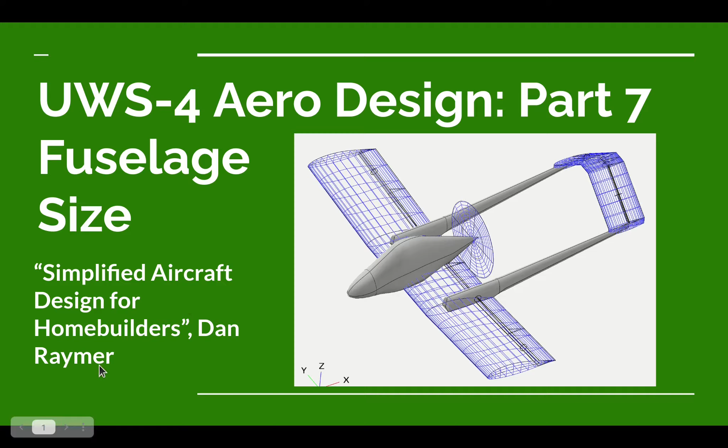Welcome to another ultralight design video of the UWS-4 Ultralight Airplane from the Ultralight Airplane Workshop. In this design series, we've been using a book from Dan Raymer, titled Simplified Aircraft Design for Homebuilders. In this particular video, we've reached the end of Chapter 3, where we figure out the size of the fuselage of our ultralight airplane.

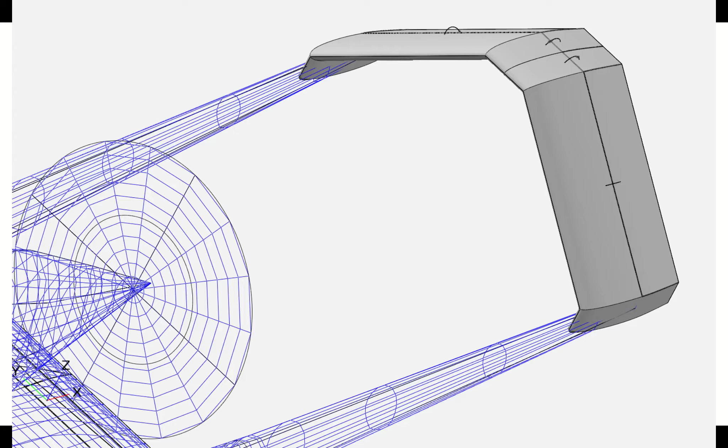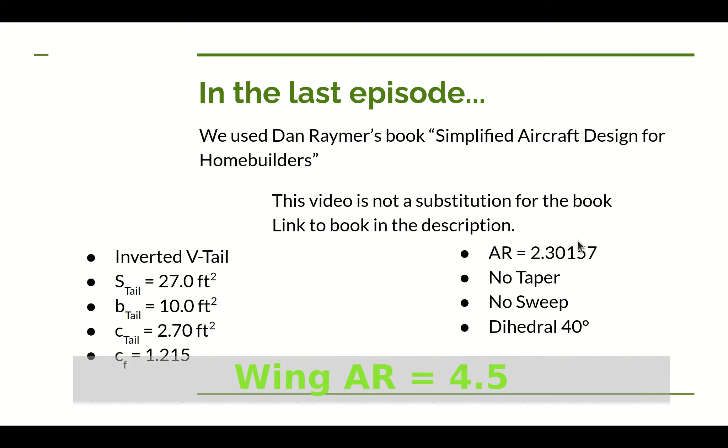Before we hop into this, let's cover a little bit about what we learned in the last video. In that video, we figured out what we're going to do for the tail of the ultralight airplane. We decided on using an inverted V-tail, largely to try to keep the tail out of the slipstream of the propeller. I want to reduce the drag on that tail, particularly because this airplane is intended to be a longer flight ultralight. I want to fly to nearby fields, but nearby is quite a ways away, so I'd like to have a little bit less drag on this ultralight so I can have a little more range. Then we figured out the span and chord of the moving part of the tail, the control surface. We checked that aspect ratio to make sure it's quite a bit less than the wing's, so that we're more likely to have the wing stall before the tail does. We're not going to use any taper or sweep, it's a pretty straight tail, and the dihedral for this V is 40 degrees.

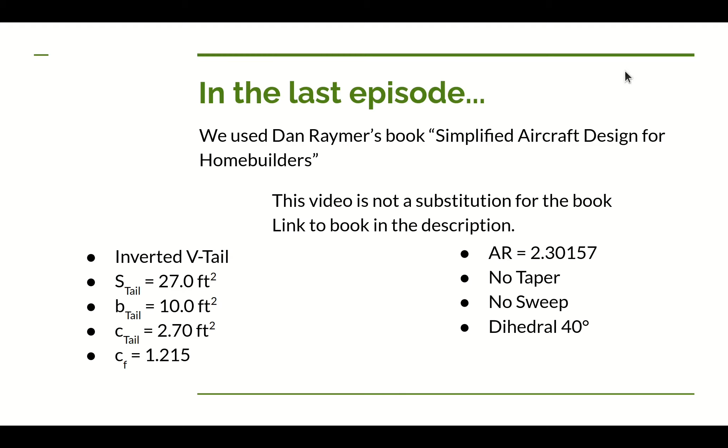There's something I should point out here that I haven't done a good job of in some of the previous videos. All this aerodynamic work we're doing right now in this chapter of Dan's book, these are really crude estimates. Perhaps crude is overstating it, but these really are just first order estimates. The reason we are doing these first order estimates is so that we can get some estimates of other parts of the airplane that would be very difficult to do otherwise, for example, the weights of the parts of the airplane. And from things like the last video, it'll help us calculate what the neutral point of the airplane is, which will let us calculate the longitudinal static stability of the airplane.

And from all that, we can come back and figure out if we need to resize any of these parts of the airplane that we're figuring out in this chapter. Now, the last thing we have to figure out in this chapter is the size of the fuselage.

Dan makes a really good point in this section. Typically, once you get to this point, there isn't a whole lot left to decide on sizing your fuselage. You already know where your main wing is, you know where the tail is. That by itself will let you figure out what the aft length of your fuselage is. Really, the only thing left is the part in front of the wing. But if you have absolutely no idea, Dan gives you an equation to get a rough estimate of what your fuselage length should be, based on the gross takeoff weight of your airplane.

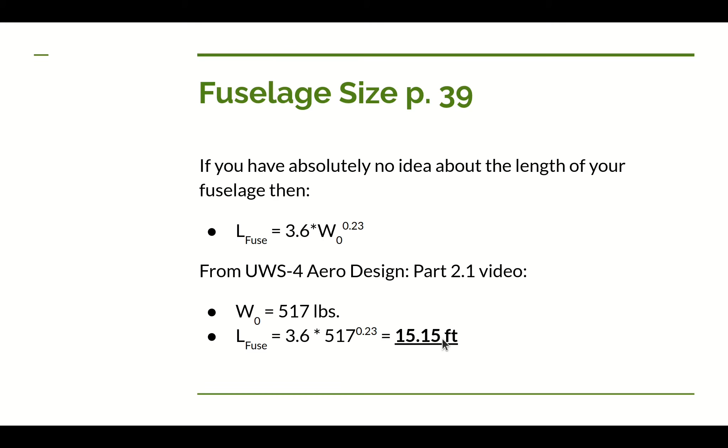So I decided, let's go ahead and plug this in, see what we come up with, and see how it compares to the fuselage length I come up with on my own without using this equation. From video part 2.1 of our Aero design, we had a gross weight of 517 pounds. Once you plug it into this equation, we come up with a fuselage length of 15.15 feet. Now it's kind of long, but it's not an outrageous length. That's not bad.

So the next thing Raymer talks about is fineness ratio. Fineness ratio is defined as the length of the fuselage divided by the diameter of the fuselage. Here in a moment we'll talk about how to calculate diameter because most of us don't have circular fuselages. There's a certain range of ratios where you can get some fairly decent drag numbers on your fuselage, whereas if you go outside that range, you're really going to increase the drag.

Now Hoerner, in his Fluid Dynamic Drag book, says that 3 - really 2.7 but rounded up to 3 - is probably the smallest ratio you want for the finest drag. You go smaller than this and you start increasing the drag. You go larger than this and you may or may not increase the drag. Raymer says for most home-built fuselages, we're getting significantly larger than 3 for our fineness ratio. We're getting up close to 6 or somewhere around in that area. But once you start going past 6, you start increasing the drag again.

Now for 3 or smaller, you're generally increasing the drag just because you're getting turbulence behind the fuselage. When the fineness ratio gets above 6, you start getting into a different kind of issue. You have a significant amount of wetted area, and within that wetted area, you're generally going to have a lot of empty space - particularly behind where you'd have baggage in the airplane, clear back to the tail. That's typically empty space you can't do much with, but it has a lot of surface area. When you have a lot more wetted area, you're going to have a lot more friction drag.

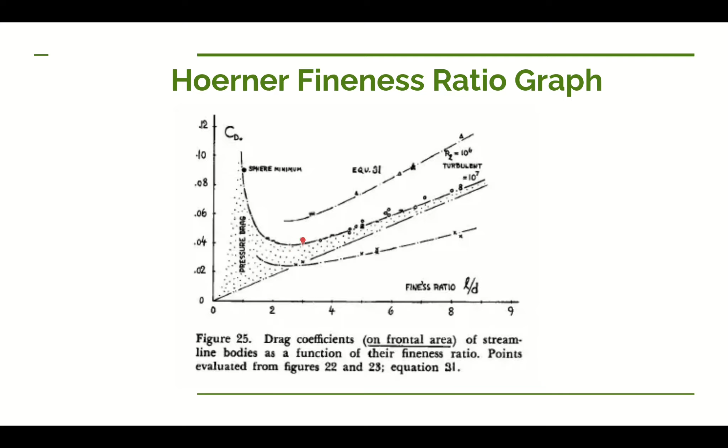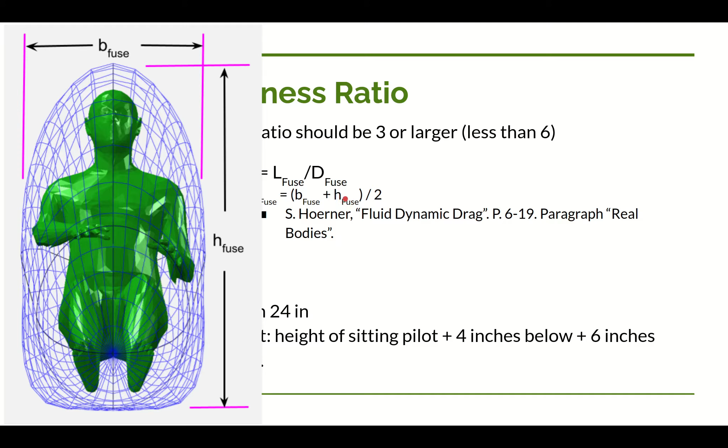Well, now let's talk about how you can get a really rough, quick estimate of the diameter of your fuselage. What you can do is take the width of the fuselage, here represented by B, plus the height of your fuselage - we're talking about the maximum width and maximum height. You add those two together, divide by 2, and you can use that as the diameter for your fuselage. Now this particular equation for estimated diameter of fuselage also came from Hoerner's book on fluid dynamic drag, on page 6-19 in a paragraph called Real Bodies.

Well, what are we going to do on the UWS-4? The Part 103 requirements for ultralights from the Federal Aviation Regulation in the US say we can only have one pilot. Well, that kind of helps us narrow down how wide the fuselage is going to be. I'm going to start with 24 inches - that's not too bad for one pilot. Now sometimes you'll see this higher, especially if you want to handle heavier pilots - you can go up to 30, 36 inches if you had a really large pilot. I'm a pretty skinny guy, at least currently, so I'm going to start with 24 inches. Down at my elbows I might want to make it a little bit wider, but I think at the shoulders 24 inches will probably be about right.

Now for the height, I'm going to take whatever my seated height is and put 4 inches underneath the seat. That's going to be for a crush area, in case I happen to have an incident where I impact the ground fairly flat, to help reduce the G-force that I experience.

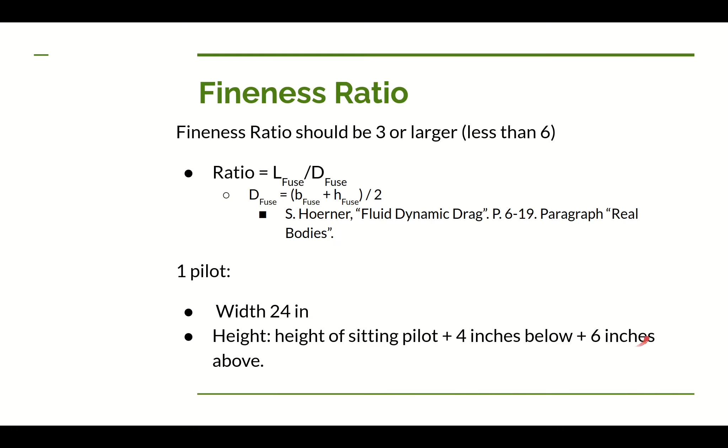I'm also going to have 6 inches above my head. That 6 inches will be for things like a helmet, headphones, and if I'm in heavy turbulence, I'll be getting bounced up and down quite a bit, so it gives me room to bounce without hitting my head against the ceiling of the fuselage.

Now here's something I'm going to add that is not in Dan's book, but some rule of thumb you can use to figure out the length of your fuselage, your first estimate anyway. Instead of using Dan's equation, the length of the fuselage aft of your main wing, assuming a conventional configuration, not a canard, is generally going to be determined by the length of your tail.

We've already talked about that in the last video, figuring out where to place our tail. The length of the tail is the distance from the mean aerodynamic chord of the wing to the mean aerodynamic chord of the tail, so that will generally determine the length of the aft part of your fuselage in order to connect the wing to the tail.

If you want to see more details about how to calculate that tail length, we did that in part 6. I'll put a link in the upper right hand corner where you can go back and see part 6 and see details on how we calculated that tail length.

Now let's talk about forward of the wing. For ultralight airplanes, we typically have a tractor configuration or a pusher configuration. For a tractor configuration, in general, your pilot's going to be seated at the CG - somewhere from the navel up to the chin of the pilot is going to be right at the CG of the airplane.

Now I'm going to show you an exception to that rule of thumb. This is an Ultracruiser. It uses a half VW engine, which is a pretty heavy engine, and in order to counter the weight of that engine out in the front of the airplane, the pilot had to be moved back aft of that CG location. So wherever the feet of your pilot is, you'll have a firewall a couple inches in front of that, and then your engine in front of that firewall.

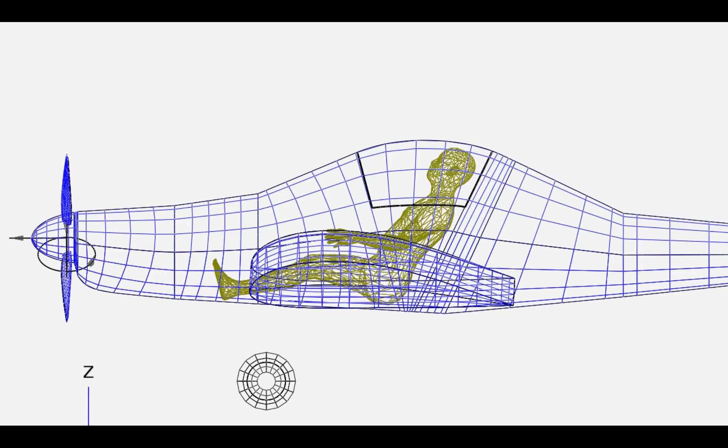Once you have that engine placed, you pretty much know what your fuselage length is going to be. So for a tractor configuration, it's pretty easy to figure out just how long that fuselage is going to be - just placing the pilot in position and the engine in front of the pilot's feet is a pretty good first estimate.

Now for a pusher configuration, we're going to assume that the prop is just after the wing, just a few inches, which pretty much places that engine right at the aft part of the wing. In that kind of position, this is a very rough estimate, but the pilot's navel is going to be pretty close to the leading edge of the wing, or the chin will be fairly close to the leading edge of the wing. So that's a good place to put your pilot to start with.

Then in front of the feet of your pilot, you're going to need a little bit of crush depth, a little bit of room to move the pedals around. So you'll need a foot for a very rounded nose, up to about 1.6 feet for a slightly more pointed nose. If you put that together, that'll pretty much determine your fuselage length - a fairly good, rough first guess on where to put things for your airplane.

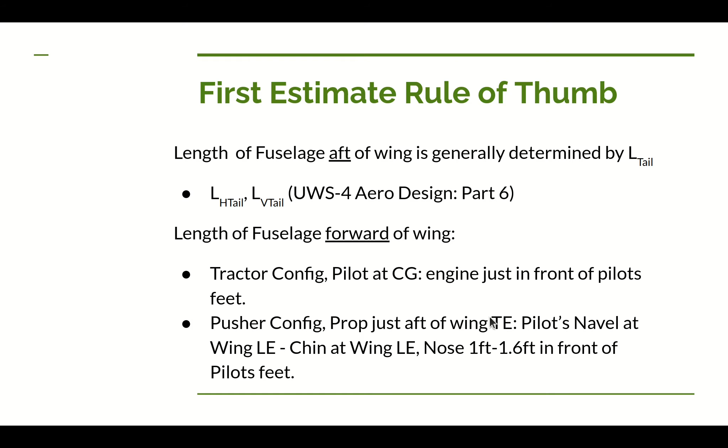Now you're going to refine this a little bit later once you start getting more reasonable estimates for the weights of the parts of the airplane. Calculating where the CG is, you'll start moving your pilot and engine around to get it right. If you want a design more like the Quicksilver MX, with a pusher configuration and no enclosure or windshield for the pilot, putting that pilot in the same position relative to the leading edge is still a pretty good starting point.

So here's what I have for the first estimate for the fuselage of the UWS-4 Ultralight Airplane. Now in the last video we figured out where to put the tail of the airplane, so all I really needed to do is connect up some booms from the wing to the tail. We already talked about why I decided not to do a single boom from the top of the cabin to the top of the tail.

I'm going to have the front part of this boom be the same thickness as the thickness of the wing, and then it will taper off back here. You kind of ignore the part of the boom that's inside the wireframe of the tail. I don't exactly know what that structure is going to look like.

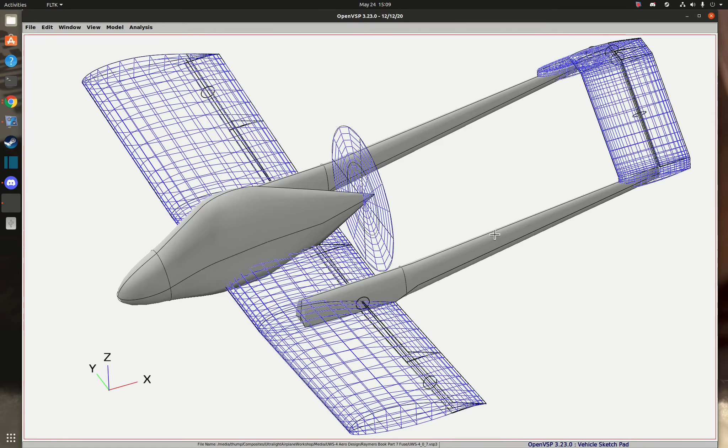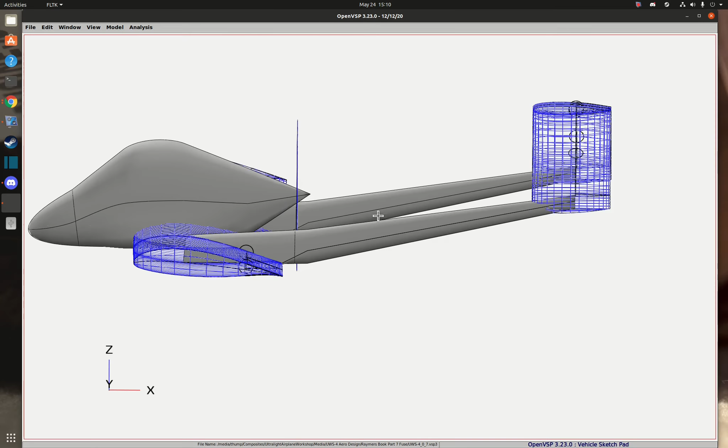One of the things I did do on this boom, as you probably remember in the last video, we talked about this boom slanting up a little bit. Let me take a side view real quick so you can see the boom slants up. I wanted to try to reduce the drag from this boom. I didn't want to use a round boom, so it's actually teardrop shaped. It's round on top and comes to a point underneath. But with the air flowing over it like this, it's a nice teardrop shape, and that should help reduce drag on this boom. I'm probably going to get some drag in this area here.

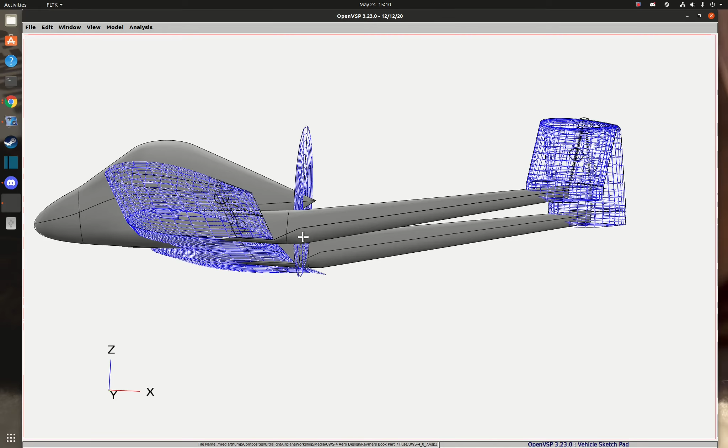The downwash of this wing is going to come down a little bit like this, so I could end up having a little bit of a drag area, an air bubble, an air separation in here. I might try to figure out a better way to fair this so I don't have some drag here.

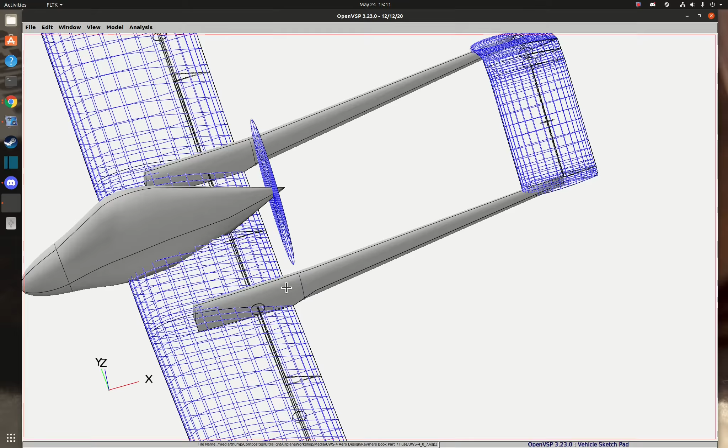One of the things I did do to try to reduce interference drag is that I kept the width of the boom the same from up here at the thick part of the airplane to the trailing edge. That way I only have one direction of pressure recovery, that's along the wing. If I were making this boom slimmer in this area as it went back, that'd be a lateral pressure recovery area also, and that would end up causing interference drag. So right in here, the boom is straight laterally until I get past the trailing edge of the wing. That will help reduce some interference drag.

And I'm also going to have to do a little bit of work right in here to reduce interference drag. I'm going to have to put a fillet in here. Now let's move on to the cabin here.

Now, something that will definitely change in the future is this area in here. This is where the engine's going to go. So there's going to have to be a cowling around here, which makes this area much bigger. I'm not sure how I'm going to make good streamlining here, but at some point I'll get that figured out. This is where the engine will go, so this will be a little bulkier in the future.

Now I want to have an enclosed cabin on this airplane if I can afford the weight, so I can reduce drag on this airplane so that we can extend the range. Let me make this cabin transparent and we'll pop in the pilot so we can see where he's sitting.

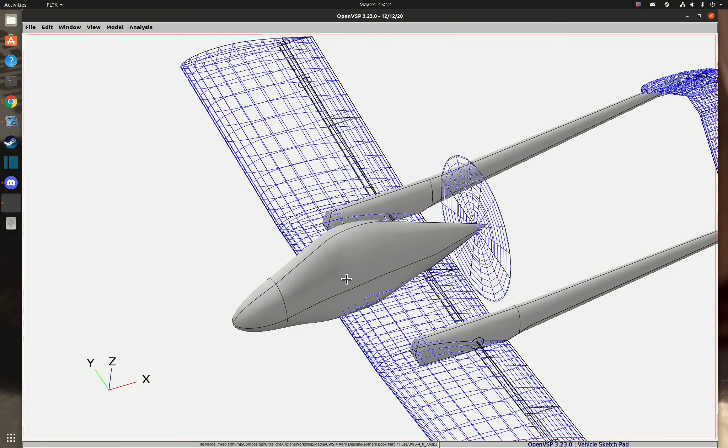So as you can see, I've placed the pilot with his navel and chin kind of dividing the area right here at the leading edge of the wing. So that's going to be my first estimate on where the pilot will be. My guess is that I'll end up having to move him a little bit farther forward.

This engine is fairly far back here and going to be fairly heavy, and I think this pilot's going to have to come forward just a little bit more to get this CG close to the 25% chord of the wing. And I've got about a foot of area from the feet of my pilot up to the nose.

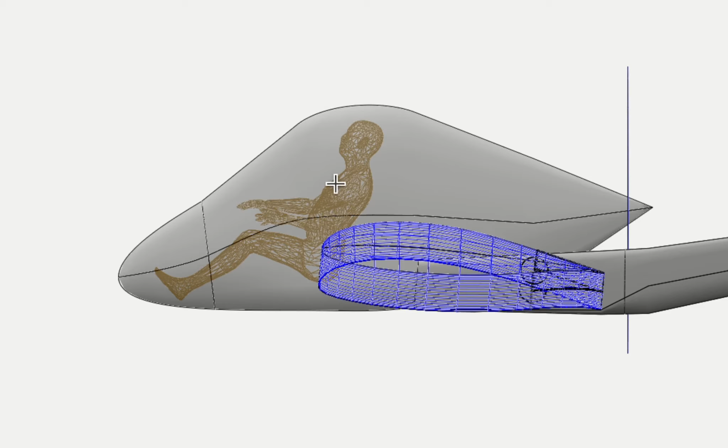I've got a little bit more than 6 inches of crush depth under here, and I probably need to raise this area up here. I don't think I quite have 6 inches above his head. I'll probably just lower the pilot just a little bit.

Now, one of the issues I'm going to have with this current setup is going to be interference drag right back here. Let me zoom in on this. Now here I've got a problem that I avoided back here. Here I've got this boom being the same width all the way back to the trailing edge. Well, I don't have that situation here.

We have pressure recovery from the thickest part of the wing coming back to the trailing edge, but I also have pressure recovery here on the fuselage. So that's going to give me some drag problems right in this area. Now I can reduce those drag problems by putting a fillet in here.

I've also reduced the drag problems a little bit. If you remember from a recent video on interference drag, I don't have this point coming all the way back to the trailing edge. If it did, I'd have even more interference drag. So since I've got this in front of the trailing edge, instead of way behind it where the prop would have had to be moved back too, at least I'm reducing it some. I'm going to have to do a little work here to try to reduce the interference drag in this area.

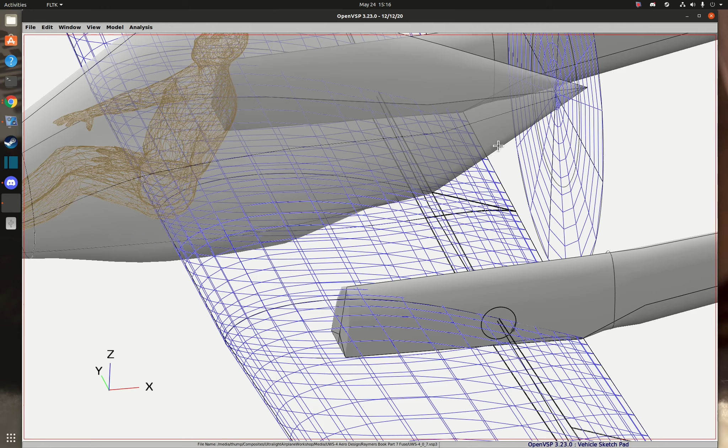Another reason I didn't bring this all the way back is that I wanted better effectiveness on my flaps. If the fuselage had come all the way back to the trailing edge, my flaps would not have been quite as effective. So I should get better airflow over these flaps by moving this contact point between the fuselage and the wing to right here, where the rear spar is going to be.

Now back here where the pilot is in the cabin, one thing I want to do in the fairly near future is a mock-up of my seat and pedal positions, to try to figure out what a comfortable seating position will be for an extended period. I'm just going to fix it up so I can sit at my desk here in the office in the position I plan on being in the ultralight, and see if I'm comfortable after sitting in that position for several hours.

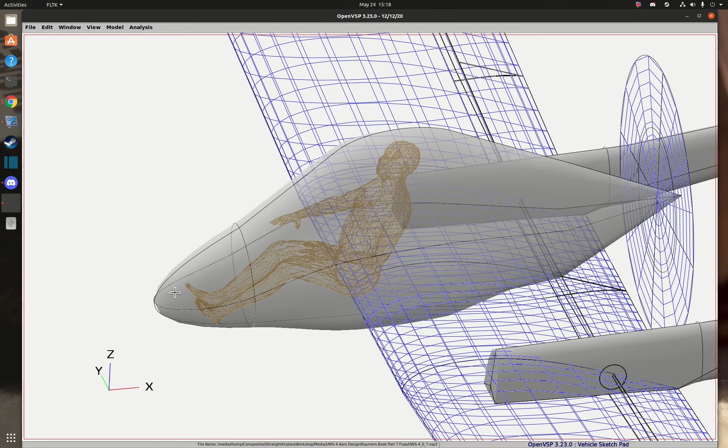Then I'll also do a little mock-up of a cabin to figure out what kind of roominess I want, how far in front of the pilot to place the instrument panel, where to put the control stick to make it comfortable, and how to do the rudder pedals. Once I get all that figured out, I'll come back here into OpenVSP, which is what I've been using to do all this work, and put what I've learned into an updated fuselage shape.

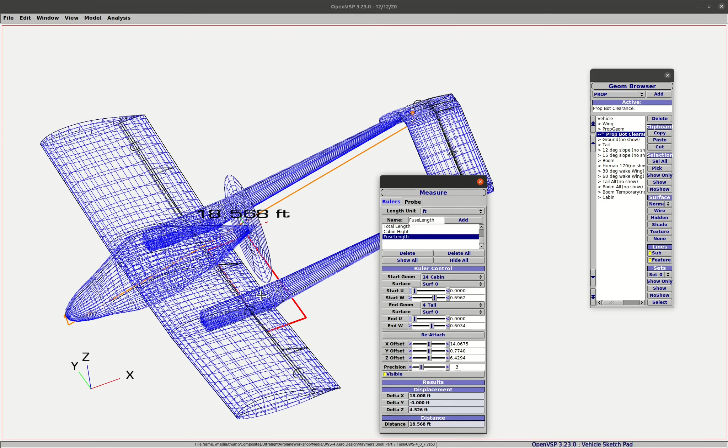Now if you remember, way back at the beginning we used Raymer's equation to get a rough estimate of the length of our fuselage. Let's find out how my design compared to that equation. We came up with roughly 15.5 feet given our gross weight. Using OpenVSP's measurement method, measuring from the nose of the cabin back to 25% of the tail, the direct length is 18.5 feet, but that includes some height, so we need to look at the X length, which comes out to 18 feet. So I'm actually 2.5 feet longer than what Raymer's calculation came up with.

I kind of suspected that was going to happen, because if you remember, back when we were looking at the tail geometry from the left side, I had to bring the tail up fairly high to get it out of the propeller's slipstream. I also had to move it far enough back to be out of that 30-degree angle coming off the trailing edge of the wing, so the horizontal tail wouldn't be in disturbed air during a stall. That ended up moving the tail pretty far back, so it's really not too surprising.

So at least we have a first estimate of what we're going to do for our fuselage. What's next? We're going to start working on chapter 4 of Raymer's book, which he's titled 'Stuff in Some Stuff' - things that are not aerodynamic but that you need on your plane to make it usable. So it'll cover things about the pilot, which we've touched on, where to put baggage, instruments, the front view looking out the cockpit, landing gear, where to place the engine, engine cooling, our overall structural plan, and fuel tanks. I'll cut this up into a few videos since it's too much for one.